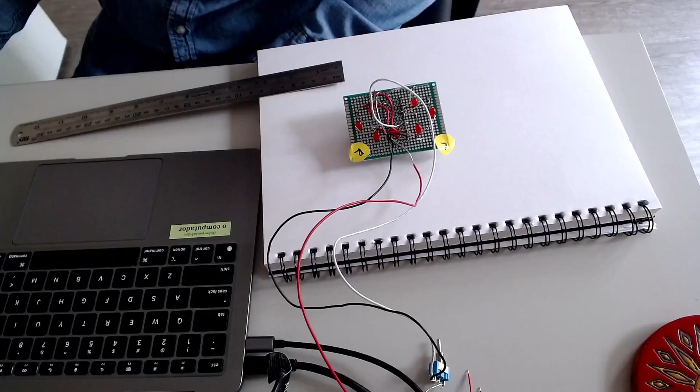All right, so let's get started. I'm gonna start with Onshape. We're gonna sign in. Oh no, sorry, my bad. First thing we're gonna do is we're gonna take some measurements. So, well, this is the PCB. I mean, this is just a prototype, this is not the final one. This is 8 by 6.

Actually, you know what? The first thing I think we should do is 3D model this kind of board. Yeah, actually, that's what I'm gonna do.

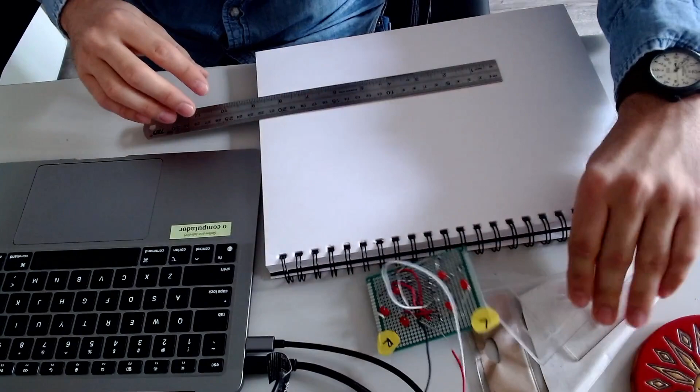But also, I have a piece of paper here because what I want to do is make a drawing here. Straight line. 8 by 6.

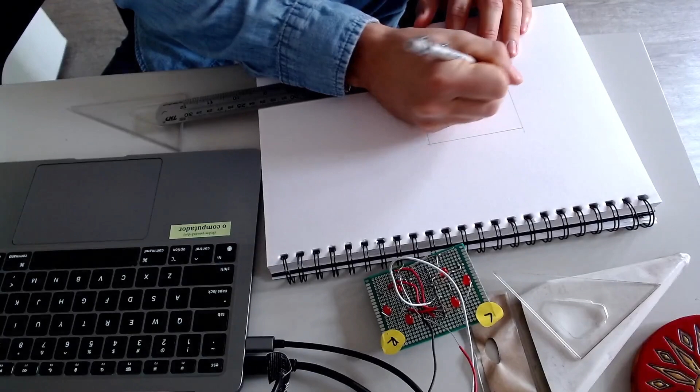So that's kind of like my PCB board, and it's gonna help me figure out, well, I have a little hole here, little hole here, little hole here. It's gonna help me figure out how big I want the case to be.

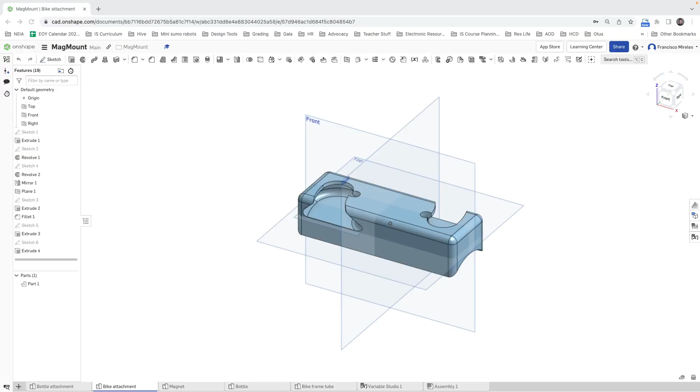So I think just a bit more because, let me just... sorry, that's another design, it's just the PCB board and nothing else. Well, I mean, I have these like things. Actually, I should have brought my bolts and everything, but anyway, you can picture like, let me go to my drawing again.

Kind of like in here we can have these like bolts coming in. So I think like 10 centimeters would work. So like 5 should meet 5. So like... actually I'm going too much into detail here, which actually doesn't matter, but you know.

Ten. No, sorry, no, no, no, my bad. 5 should meet with middle. So like from here to here. Actually, it could be a bit less. 9.5, I think, so 4.5 here in the middle. Yeah, I think 9.5. I will start with that.

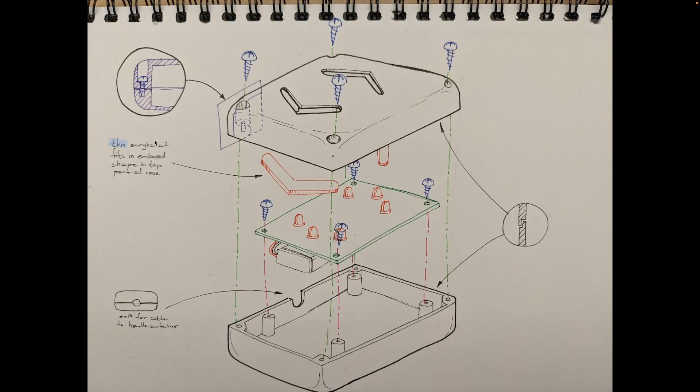All right, I'm gonna create a new folder called bike blinkers, which is the name of the project. I'm gonna enter that, create document. It's called the bike blinkers 1.0.

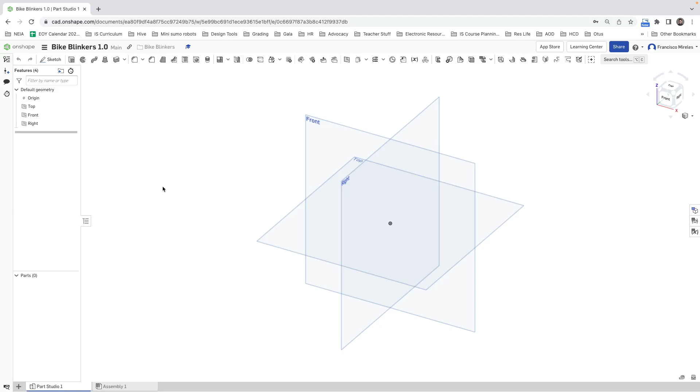First thing I'm gonna do is design the board. That's gonna help me use it as a reference and make sure it all fits in. So it's pretty simple, I'm gonna go to top, I'm gonna go to new sketch. Top. So I'm designing the board here, the board, right?

80, 60, and the little holes matter a lot. I know, such a bummer because they're so freaking small, but you know, that's how it goes. So there are two things that I worry about.

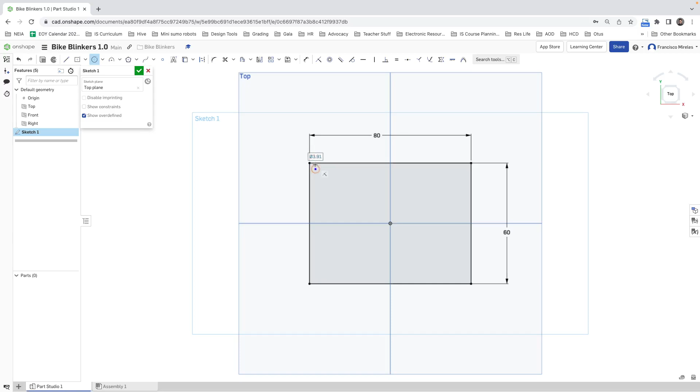Oh my god, what's going on? My caliper is kind of old. Alright, give me one. Okay, so what I'm gonna do now is I'm gonna measure with my caliper these little holes.

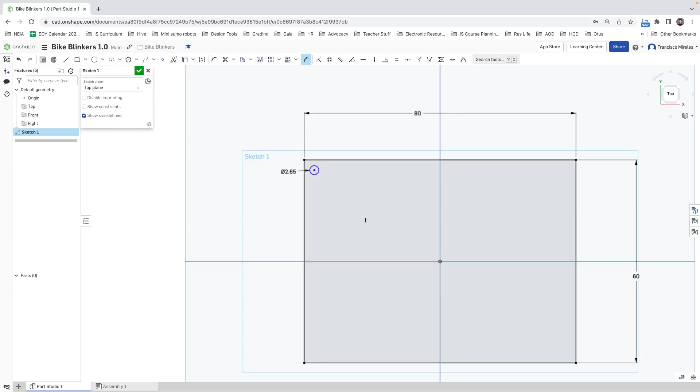2.65. I'm gonna go back to here, and so I have the little hole, this little hole, 2.65, and the distance of the hole to the edge, it's 1, pretty much 1 and 1. We're gonna trust that I got it correctly, and I'm gonna click here, say, you know, this is 1, and here to here, 1 again.

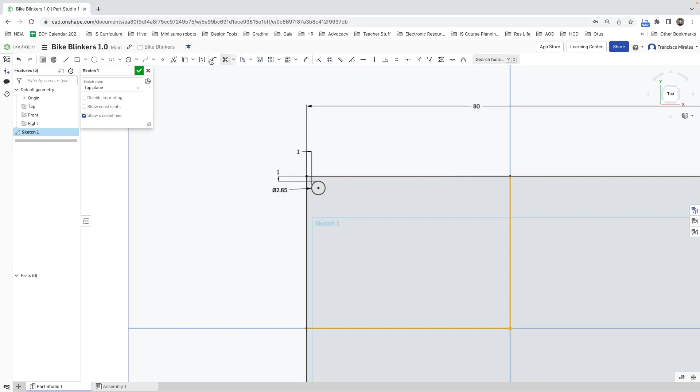Now I'm gonna make a line from here to here, and then a line from here to here. And these two lines are gonna be construction.

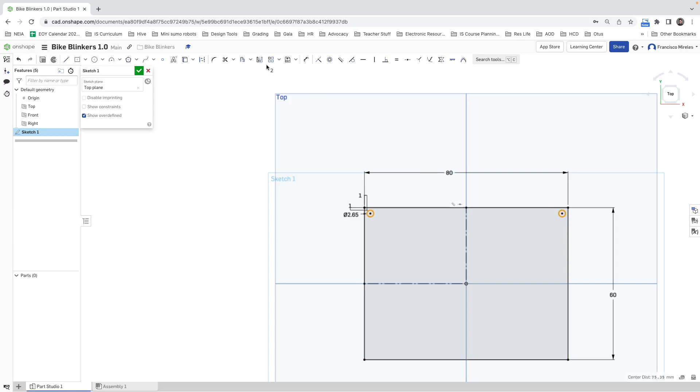I'm gonna select this circle, and I'm gonna say mirror, and it says select a mirror line. Click here, and it appears here. Now, same procedure. I'm gonna click here, these two circles, mirror, select a mirror line, this one. There you go.

And that's how we end up with the 4 different holes. Now I'm ready to extrude this whole thing. It's gonna be really thin because it's like only a PCB board. Actually, it's 1.5. Well, wait. Yeah, 1.56.

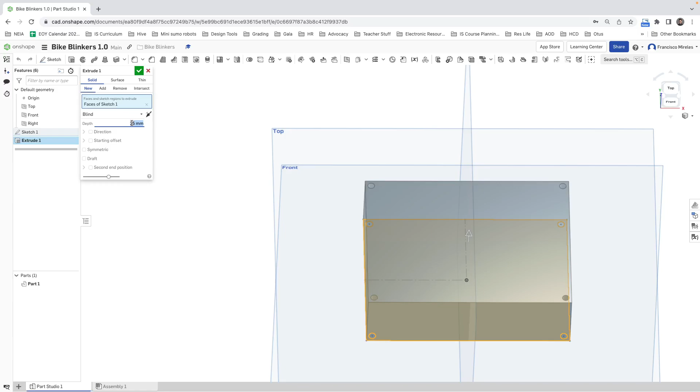If you're seeing inches and stuff, you can just modify the inches and put millimeters. If you want to change the overall document units, you can go here, workspace units, and change this to millimeters. I suggest you do that, actually.

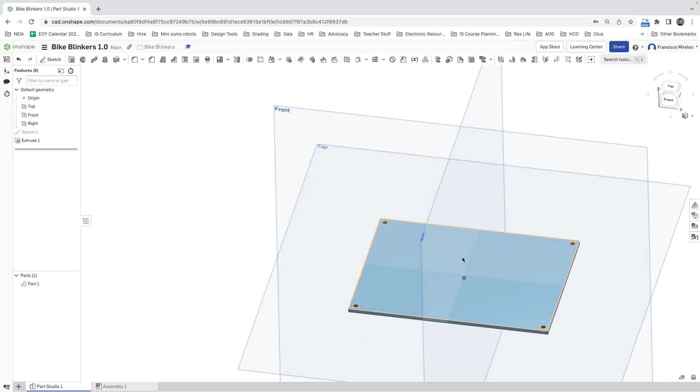Great. Now, the next thing I need to do is, well, first of all, blow my nose. Sorry. All right, we're gonna measure the distance of the LEDs towards the...

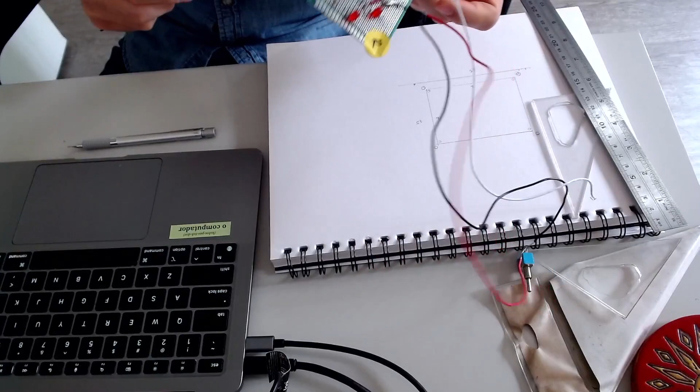Actually, only one of them because it's symmetric. So, for example, let's start with this one right here. Well, first of all, I need to replicate these LEDs in the simplest way possible, like a cylinder, pretty much. But we need the dimensions of it.

So for example, the diameter of it is 5, right? And the distance between the lower part and the edge is 27. Well, actually, it would be better to have the center. It should be 29.5 actually. Yeah, 29.5.

All right, so I'm gonna get in here, new sketch on the top of this. I selected the face, I don't know if you noticed. I click on the face, right click, new sketch, and then go to top.

And then here, I'm gonna make 3 circles. Actually, I'm gonna make 1 circle here. Make sure they are not actually 2 circles because I can mirror the other one. And yeah, like...

Actually it's pretty interesting that it's not in the precise middle. I mean, it's just like, not rough. You want to be precise, but not that. I mean, I wouldn't worry too much.

So for example, like from the center, from here to here, it's 29.5. Oh, sorry, you're not seeing my screen. Anyway, let me...

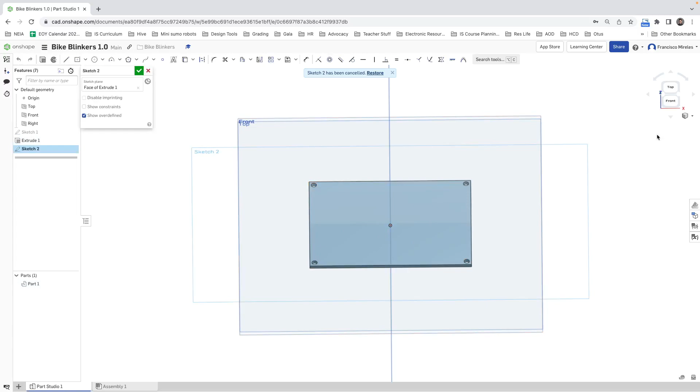I'm gonna click on this face and I'm gonna make a new sketch, and then I'm gonna draw. I'm gonna go top view, circle, here, here, 2 of these. Both are gonna have the same diameter.

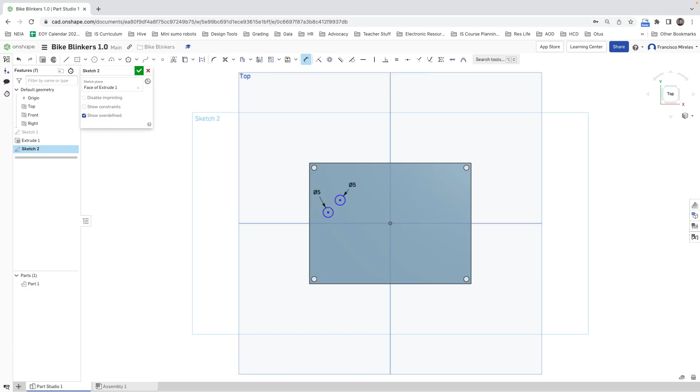Oh sorry, da da da da da. 5, and oh yikes. 5, and then the distance from here to here is 29.5, and then the distance from the other edge, it's 7, but not from the center, from here to here.

There we go. And now this one right here, I'm hoping it's symmetric. Hopefully it is. Okay, I cannot measure the one from one side. I'm gonna try the one from the other side. Well, 14.6.

So actually, I'm not gonna mirror it. Changed my mind. 14.6. I'm gonna mirror to the other side. That I'm doing. 5.

Okay, that's that. So they're in the same line, these two. So I'm gonna make a line here. I'm gonna tell this line to be a construction line, and I'm gonna make that line vertical.

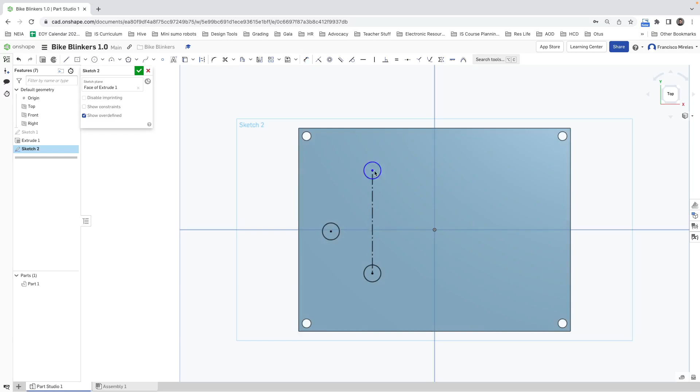And now this one is kind of like blue. So if a drawing is blue, it's because there's still things to constrain. So we can just measure... 15.45.

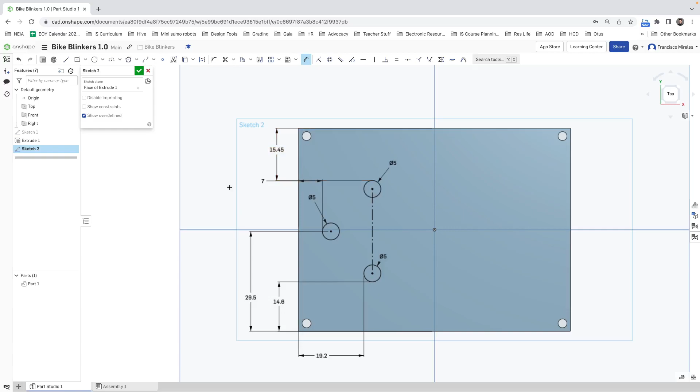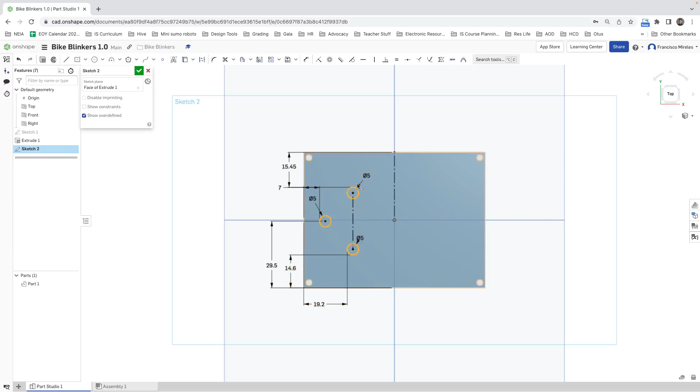All right, that seems accurate, I hope. Before I extrude, I'm going to make a construction line from here to here. I'm going to select all these three circles, actually I don't need the line, just the three circles, and I'm going to mirror, clicking this line.

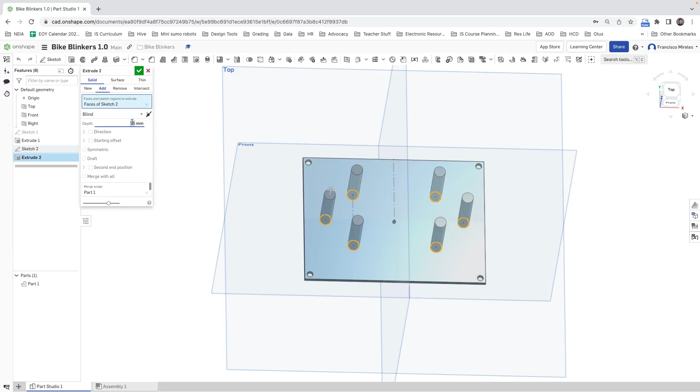There we go. Now I can extrude with the depth of the LEDs, which is the height, I mean 9. There we are, those are the LEDs, just simulating where they are, you know what I mean.

On the other side, we're going to simulate our biggest components. In this case, it's only the Arduino. Everything else, I wouldn't worry about, so I would just take the biggest, the tallest part of the Arduino, just taking into account the biggest part of it. For example, the height of the Arduino is 12.

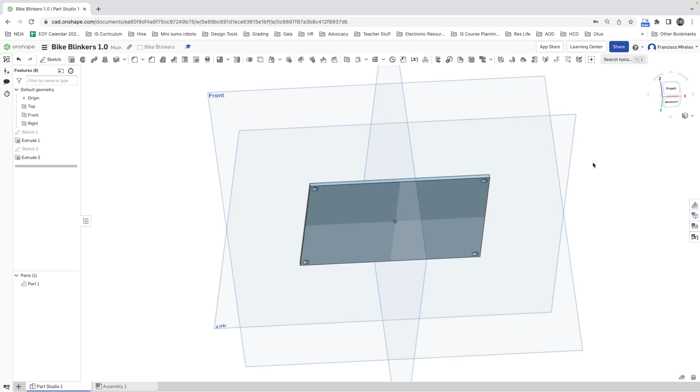Anyway, I'm going to go to this face, new sketch, bottom, and draw a rectangle from here to here. Hopefully it's in the center, let me see. 31, yes, nice, it is in the center... in one direction. It is not in the center in the other. Okay, yeah, my bad.

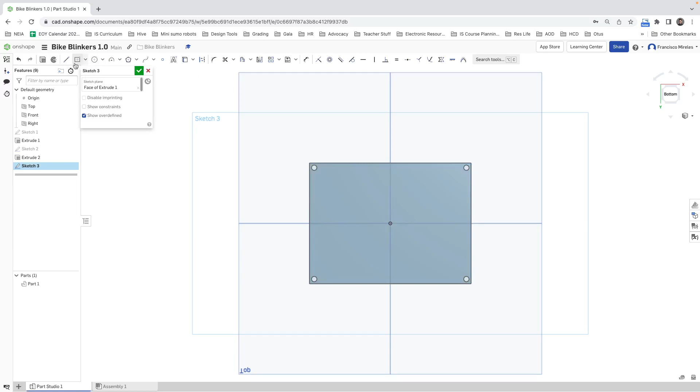All right, don't do what I do. Draw the rectangle. It can be, I'm just gonna draw it here, whatever. And then it's a bit lower than higher.

Now I am a bit worried because my LEDs, there's one side that is 15.45 and there's one that is 15, and one that is 14. So let me see how that relates to the Arduino. Let me see. Actually, 1, 2, 3, 4, 5. No, they should be symmetric actually. My bad, I think I took the measurement wrong. And it's pretty much 15.

So I'm going to change this 15 to here, and this to 15, and the other ones are going to change automatically because of the mirror. All right, so that's symmetric. That's good.

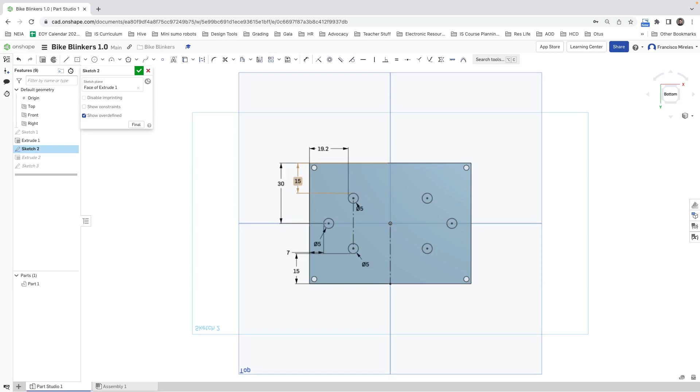Let me just count. 1, 2, 3, 4, 5, 6, 7, 8, 9, 10. Oh, so actually this one should be symmetric too. My bad. All right, so that's symmetric, all in all. Good, so I don't have to worry about how this ends up. I just know that this one is a bit higher than the other.

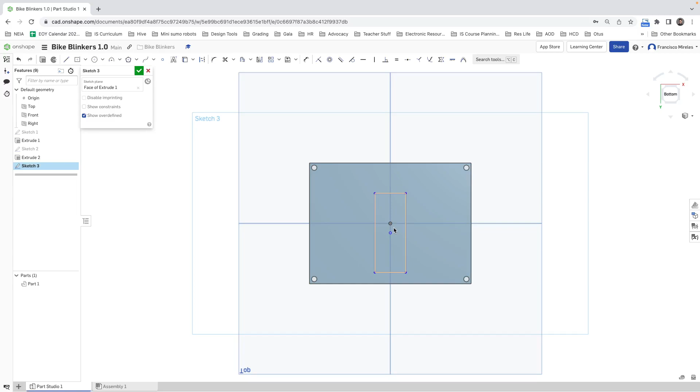That's a fact. First off, let's take the width. The width is 17.6. So actually, you know what, I'm going to turn the camera on, but put it on a side here. Or maybe here, yeah, let's see which part I use the least. Maybe here. Okay, hope that doesn't block anything. So, 17.6.

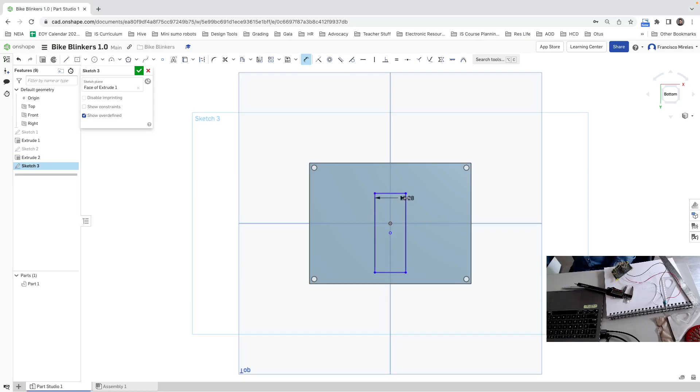17.6, and then from here to here, 14.9. Well, you need to take the most, the biggest part, so just going to go with the outermost, even if that's not the blue part. 44.8. 44.8.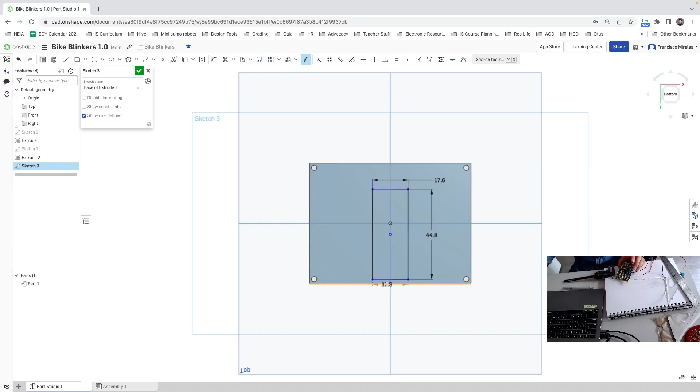And now the lower part is 7.5, so from here to here, 7.55, there we go. Actually, it is kind of symmetric, 7.65. Oh my god, anyway, all right.

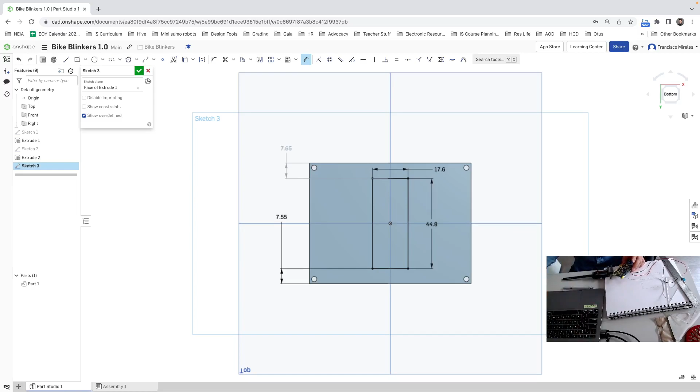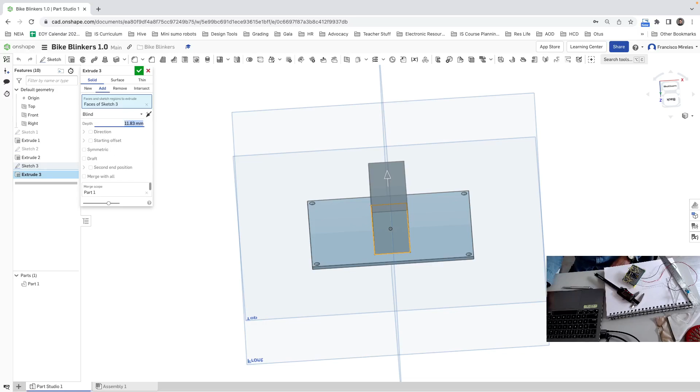Maybe I overcomplicated things. And then I'm going to extrude this, the whole height of the board, which is 11.8... 11.83. So this is telling us that we shouldn't mess with this, you know what I mean, right? We shouldn't be interfering with the plastic around this thing.

All right, so this is how we make the main component, right? There are more things, if you can see here in this prototype, like the resistors and cables, but hopefully the resistors don't matter because they're small, and the cables will end up disappearing when we do this correctly.

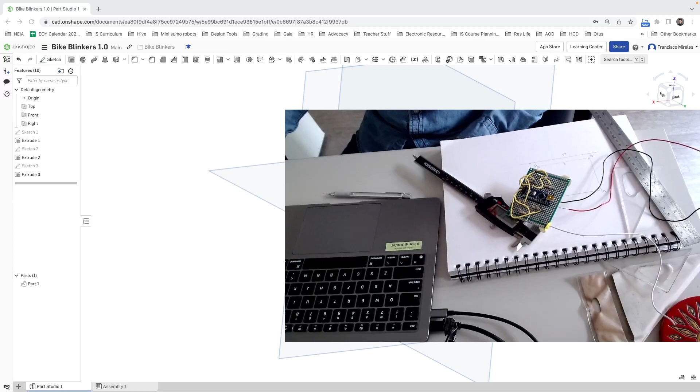But now we have this part, which, let me just make this small, we're going to rename to PCB, all right, PCB. And okay, we're going to leave it up to here for this tutorial.